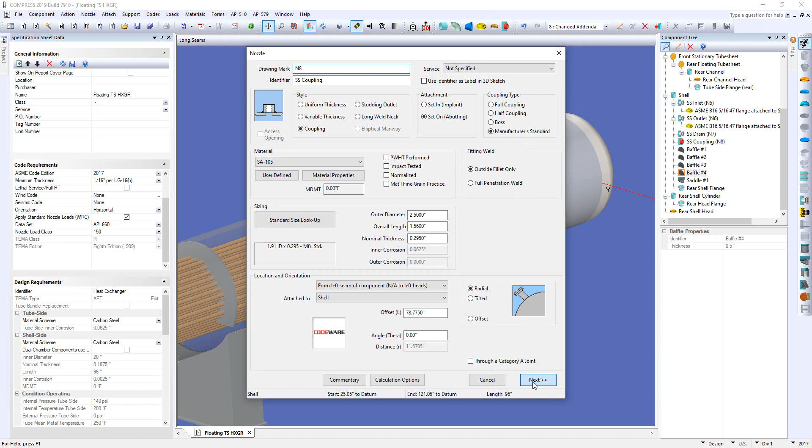Going through the dialog, as you can see I selected an outside fillet weld only, so you can now put your small attachments on with a single fillet weld. So we've made these updates for couplings: allowing you to specify them hillside or offset, and giving you two new coupling types.

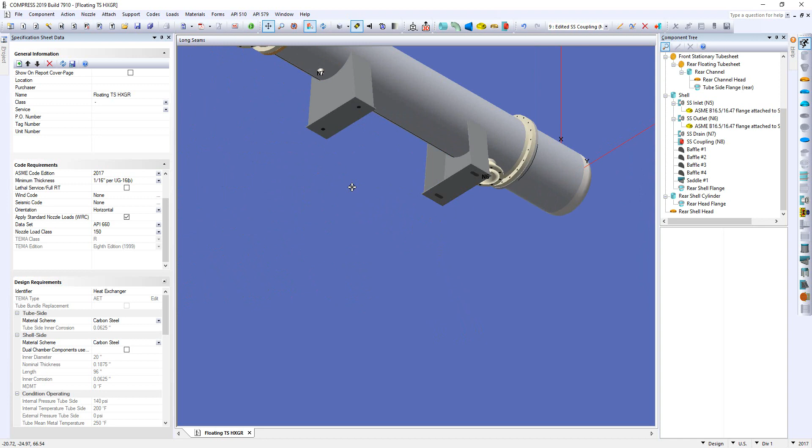The next thing has to do with saddles. We've added in some slotted holes. If I rotate underneath this heat exchanger, you can see two fixed holes for the front saddle and two slotted holes for the rear saddle.

These get translated into our solid model, so if you're using our Codeware interface to export to, say, SolidWorks, these hole dimensions will be cut in the saddle base plate on export. Let's right click on the saddle and go through the dialog.

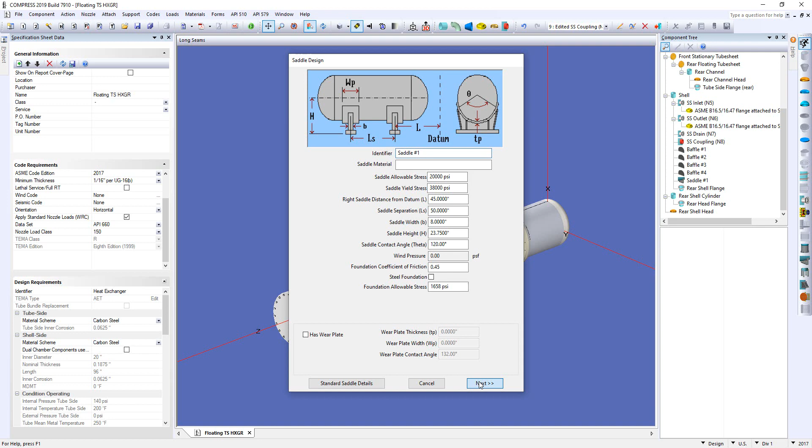The bolts are specified on the second page under the bolting section. There's an option for the number of bolts per saddle, and which saddle you'd like the slot located on—you can specify either right or left, and the slot length as well. Once you click OK, the slot lengths will be modeled for you.

So those are some new features we've added for the general Compress user. This applies whether it's a vessel or a heat exchanger—those options are now available.

Now I'll talk specifically for heat exchanger users for the next two features. One thing we've added is material schemes. Many of you know we added material schemes a little while ago in previous builds, but now you can specify them for heat exchangers.

So if you have a material scheme for the tube side or for the shell side, you can now specify it just as you would for a regular pressure vessel—simply select the material scheme from the specification sheet data pane.

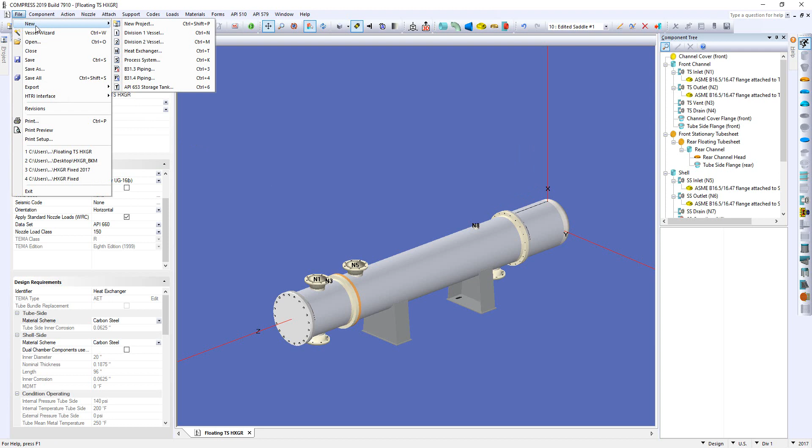Next I'll show you something using a new heat exchanger file—go to the File menu, select New, and select Heat Exchanger. We're beginning to revamp the heat exchanger dialog to let you specify the configuration up front. You've got the TEMA configurations available on the first page.

You can select from the pull-down list, or—a really cool and effective way—the TEMA type defaults to an AEL exchanger type, but if I highlight it and type BEM, then hit tab, notice how the front and rear channels change to bonnets. It already picks up what configuration you want based on the TEMA type you type in.

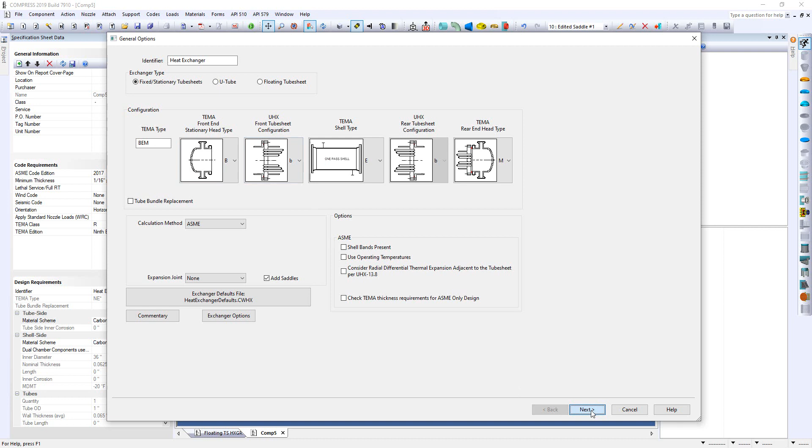I'm just going to click next through here because I want to show you something else we've done, and I need to get to the tube sheets page.

Once you arrive on the tube sheets page, since we can specify step tube sheets in Compress, we've revamped this dialog when you click specify stepped tube sheet. We've made it easier to read so you can see the dimensions more clearly between the flange and the tube sheet.

You can see the gasket, make adjustments here, and the image will resize accordingly. This should help with your tube sheet configuration, sizing, and fitting. That's been added in as well.

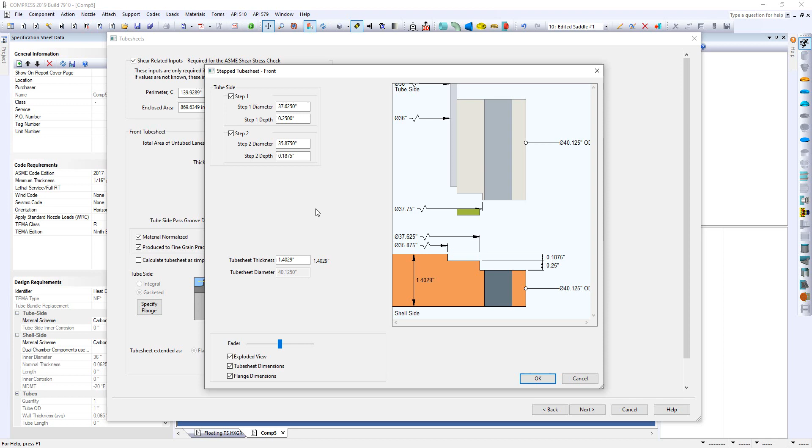So those are some of the productivity enhancements we've made for you. If you'd like a full listing of all the features we've added, come up to the Help menu and select View History. This will take you to our history document, showing a full listing of all maintenance fixes and new features, with technical write-ups on all of them.